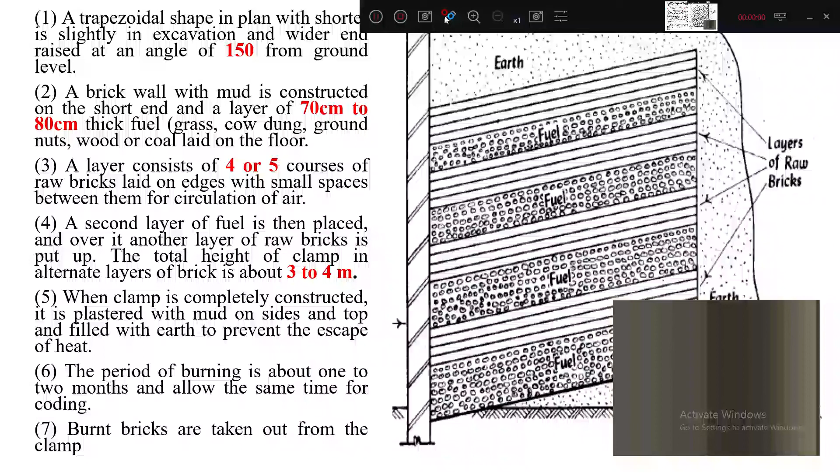So in the previous video we have seen the arrangement of this clamp and construction of this clamp. So here is the shorter side, here is the longer side, a trapezoidal shape; construction of the brick wall is what we have seen, a trapezoidal shape with the shorter side slightly in the excavation and the wider end raised at an angle. This angle, generally we explained, is 15 degrees; it's not fixed, it's somewhat 15 degrees.

So again the brick wall is constructed with the mud itself, and a fuel layer of 70 to 80 centimeter thick is laid. That is what I have written here, fuel layer. The fuel layer may be grass, cow dung, groundnut, wood, coal, etc. On the top, 4 to 5 layers of brick are done. The total setup is covered with the mud. The clamp will be 3 to 4 meter height.

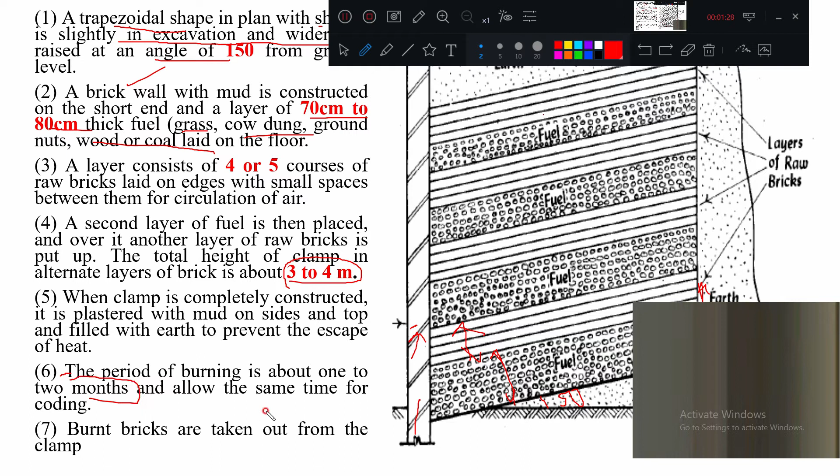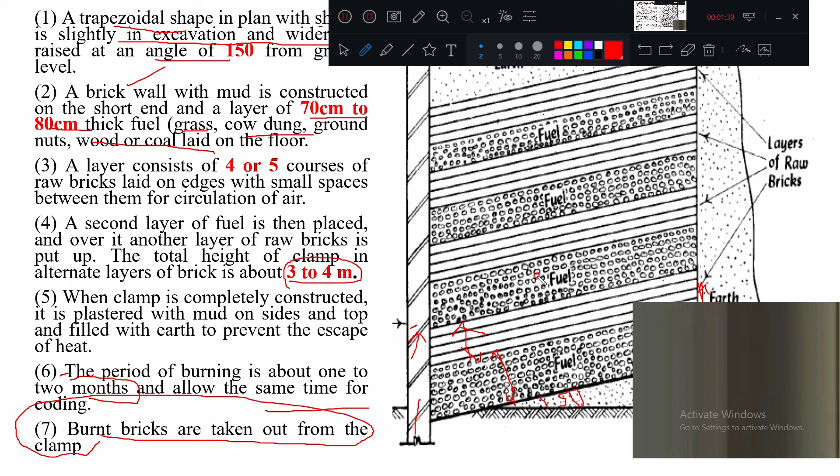Similarly next layers are also constructed, and everything will be covered under the mud to avoid the escape of heat. Here you can see the period of burning may be 1 to 2 months, and after that it is left for cooling again for 1 month or 2 months. 2 months burning, 2 months cooling. Then burned bricks will be taken out from the clamp. So this is clamp construction, or burning of bricks using clamps. This is a temporary construction, you can see.

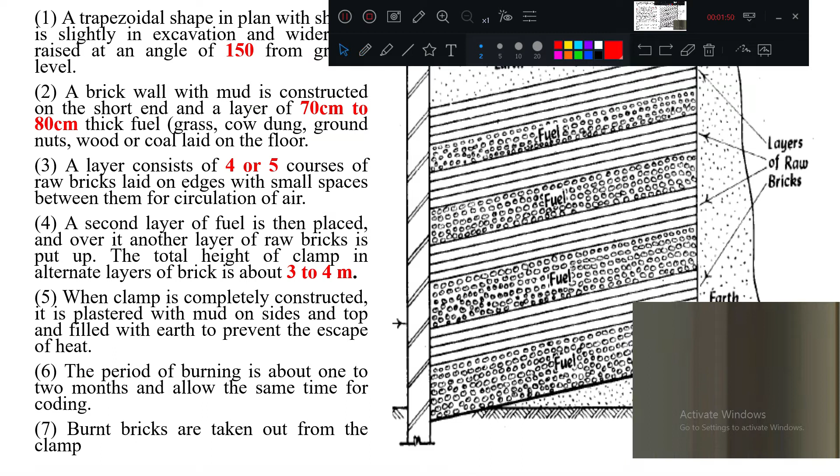So what are the advantages of clamp burning? The bricks produced are tough and strong, because burning and cooling are gradual, slow burning, slow cooling. Burning in clamps proves to be cheap and economical because the fuel used here is less costly. No skilled labor and supervision are required. There is considerable saving of fuel.

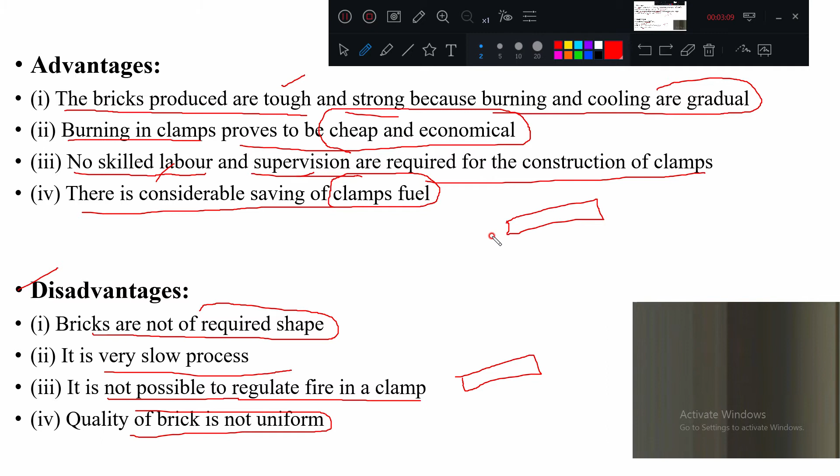Disadvantages: bricks are not of the required shape; maybe some shape distortion is there. It is a very slow process. It is not possible to regulate the fire once the fire is done, so we cannot control the fire until 2 months. Quality of brick is not uniform, meaning some bricks at the lower layer may be overburnt, and some at the edges may be underburnt. Both ways it is possible. So, advantages and disadvantages.

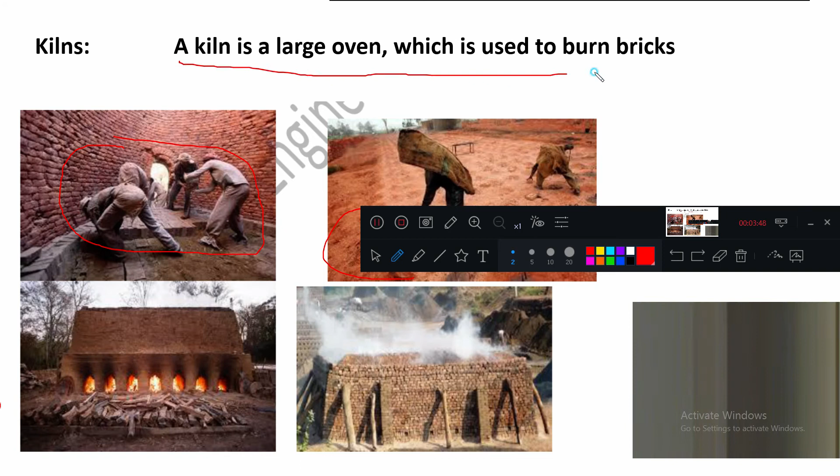Now this is a typical diagram, or you can say photos, of a kiln. It is not a clamp, you understand, it is a kiln. Here you can see the inside of a kiln. This is also one kiln. Sometimes it is called a large oven. A kiln is nothing but a large oven which is used to burn the bricks. You can see the top is open for vents; small vents are also there. Here the burning process is done continuously. Here see the dried bricks are getting arranged.

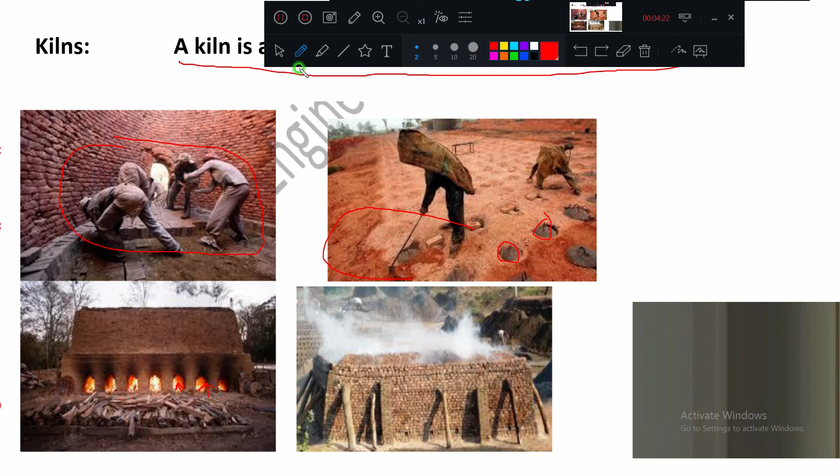I think this is the photo of a bigger clamp. Kiln photos are in the next slide. Here it is. You can easily see the kilns. See here, continuous loading; it is on a bigger scale, a big construction is there. One side burning, another side cooling, another side loading, another side unloading, like this. It is a continuous process. That is why these are called kilns, a big oven manufacturing unit. This is also one big kiln construction.

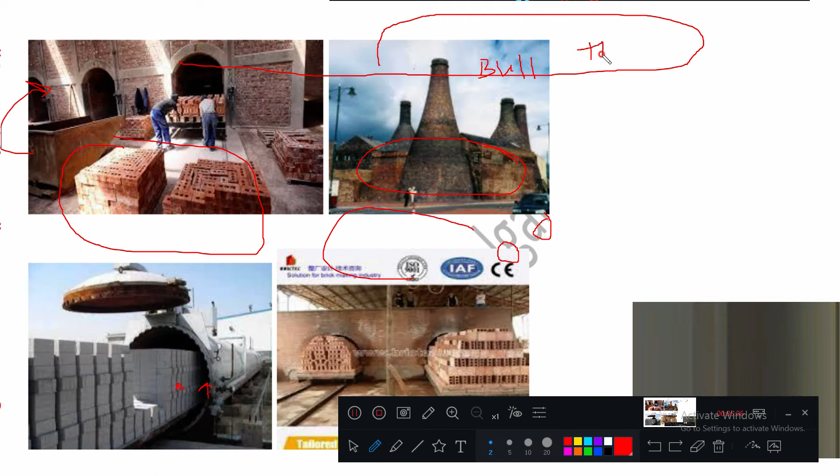It is called the Bull's trench kiln, or Hoffmann's kiln. We will see it in the next class. You remember this one: this is called a tunnel kiln. It is called continuous burning, or tunnel. Continuous movement of the bricks is there, inside high temperature will be there, and from that side you are getting the burnt bricks.

These are called intermittent. These are called continuous. I hope you are understanding. This is also an intermittent kiln. But this diagram is for a continuous kiln. How? What is the difference between intermittent and continuous? See here.

Here one set of bricks are laid, one set of bricks are pushed here, burning will be done, cooling will be done, and they are taking one load at a time. Similarly for this yard also, here also loading, burning, cooling, taking out, unloading, like that. So it is done in an intermittent way.

But what is happening in the tunnel? Continuously bricks are going inside. Here burning is there, here cooling is there, continuously bricks are coming out that side. So that is why we call it a continuous kiln. Two major classifications: intermittent kiln and continuous kiln. An example of a continuous kiln is the tunnel type.

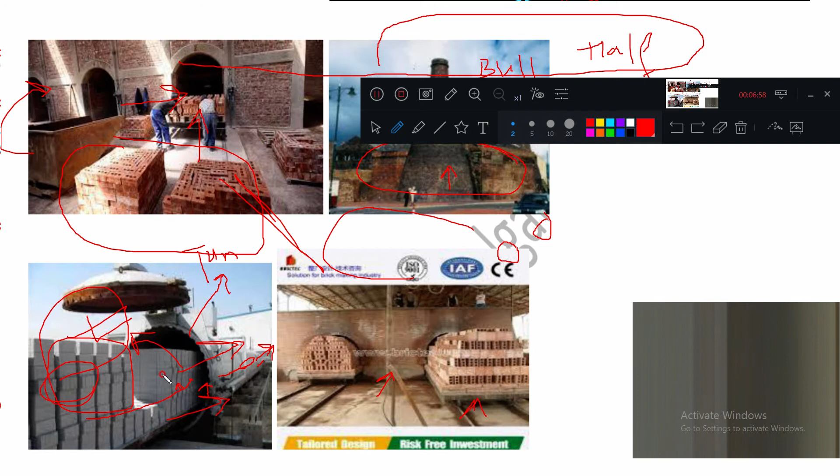But for others we have Bull's, Hoffmann's, Scotch. Like that, there are so many types. So remember this point. We have intermittent kilns where a loading and unloading system will be there. But here, continuous type: continuous loading, and on the other side continuous unloading.

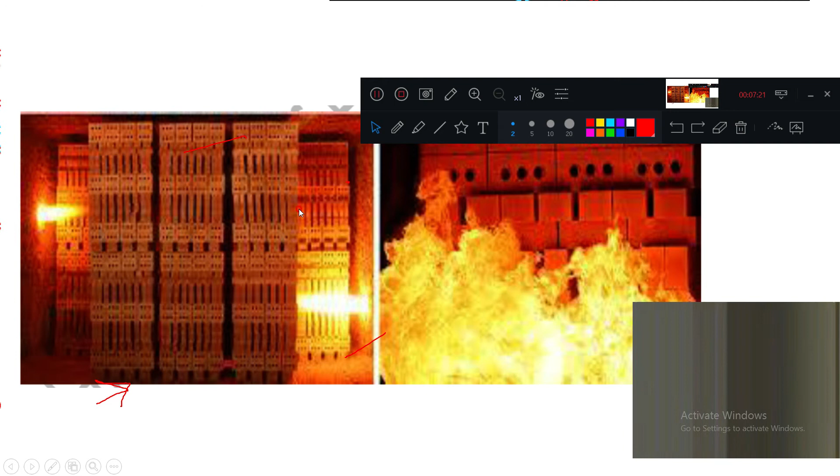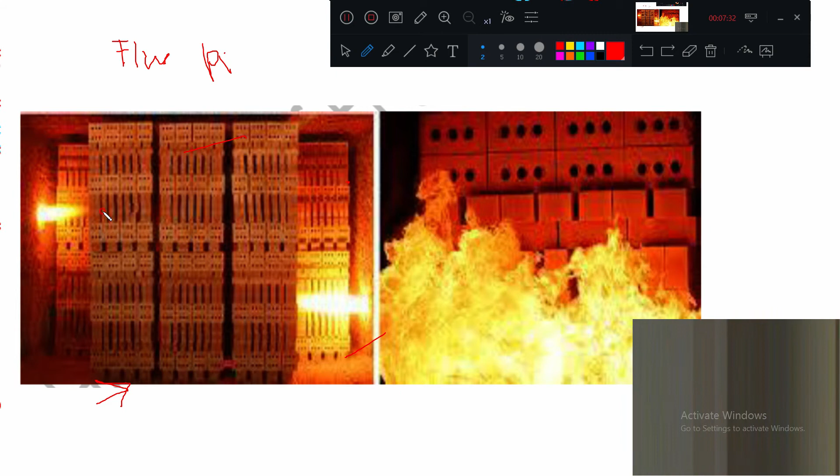You can see what is happening inside the kiln. You should understand one word: flue pipes. Flue pipes are nothing but pipes. Here the pipes are there. These pipes are embedded inside the wall and they are running in the wall. Here also like that.

Through these flue pipes, flue gases will be coming out. Flue gases, once they catch fire, will burn these bricks. Understand these two words, very important. So if the flue gases are coming horizontally and they are burning like this, these are called draught down.

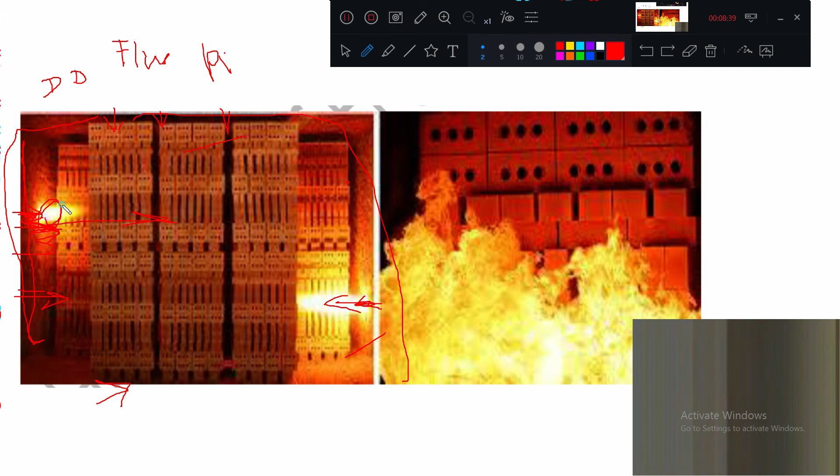In some cases the gases may come like this. See, this fire is there. These fires are coming from sideways, so that is why we have given draught down. In some cases fire may be coming from the top, so we call it draught up type. The pipe it comes through is called a flue pipe. So the burning process is done inside the kiln. Remember draught up, draught down, flue pipes.

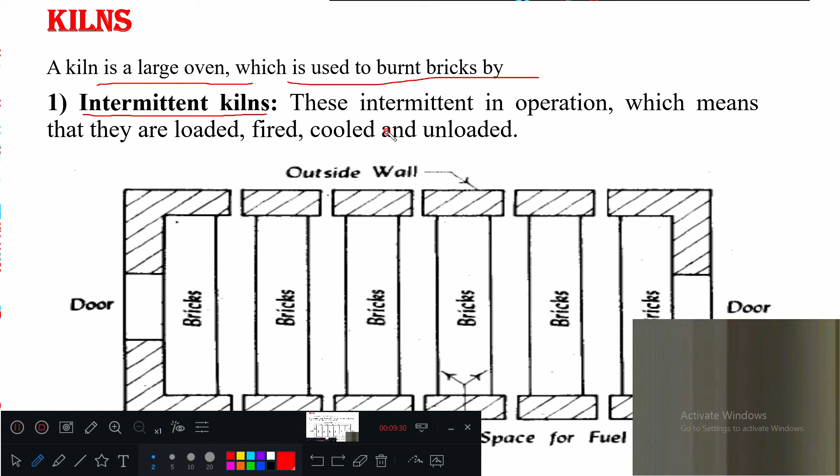Now you can see kilns. What I was telling, intermittent kilns. A kiln is a large oven which is used to burn the bricks. Intermittent means what? It is intermittent in operation, which means they are loaded first, fired, cooled, unloaded.

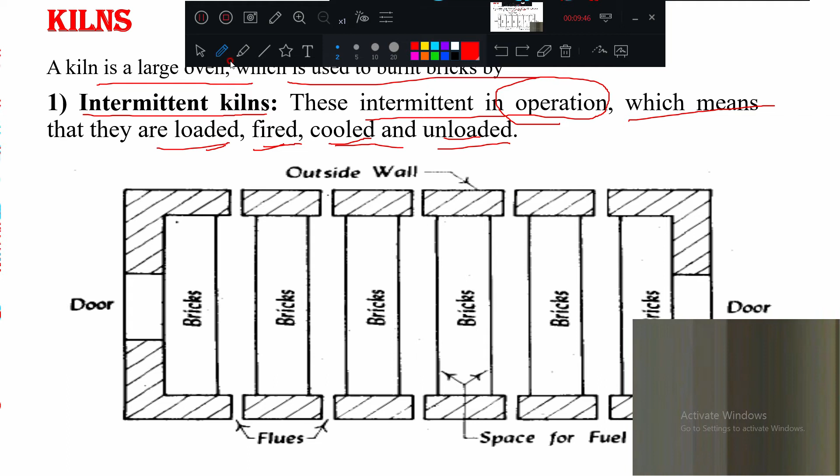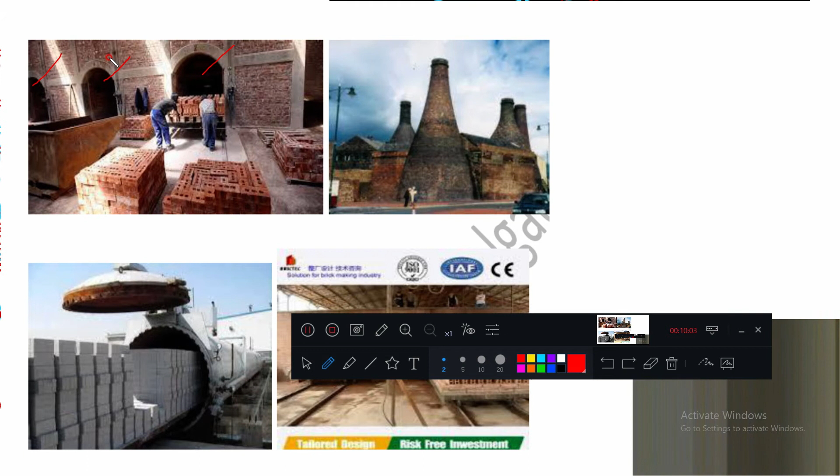So this is each compartment. This is a plan. We can go to the previous one. For that, this is the schematic diagram. Can you see this diagram? So these are the compartments I was showing for this kiln setup, the plan we are drawing. You can see the plan is this.

This is the entry door. This is also a door. These are fixed walls, or, sorry, these are bricks. So bricks have been kept like this. Inside the bricks, what is this? Flue pipes or flue gases. So these will burn them. Is it okay with you?

So door, and bricks are kept inside. This is a plan. Flue gases or flue pipes will be there like this. So the gases will come and burn this. So that is an example of intermittent.

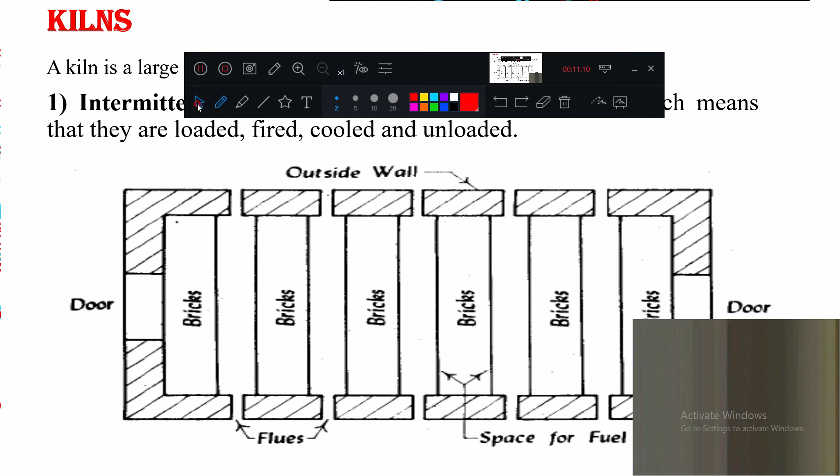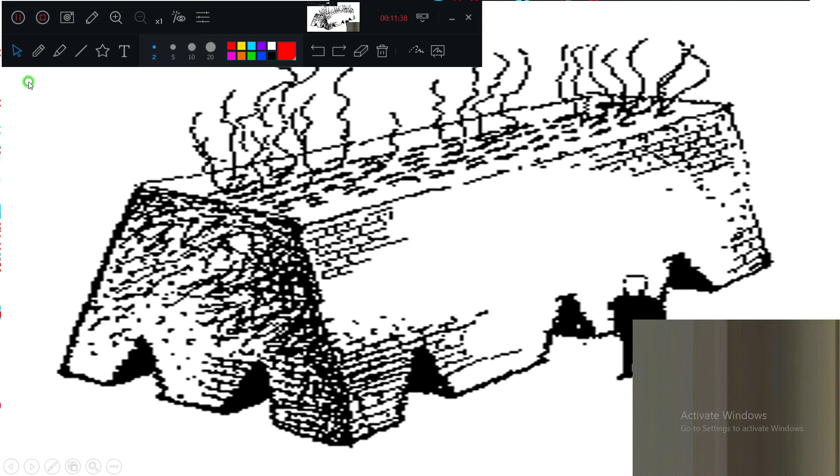This is also one schematic diagram for bigger clamps. This is a clamp. So again clamp burning is shown here. Chambers have been made. That is also the same photograph. After burning it is left for cooling, and the burnt bricks are taken to the site. These are called clamps. You can easily see.

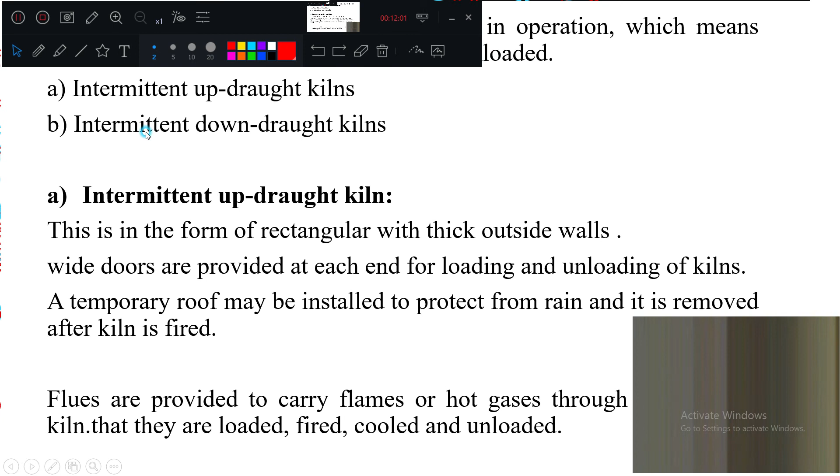This is the intermittent kiln we were discussing. Here you can see intermittent kilns. Also we have up-draught and down-draught, what we have shown. This is also in rectangular form. Just remember rectangle with thick outside walls. Here also the doors are there. Temporary roof, no need to remember this thing.

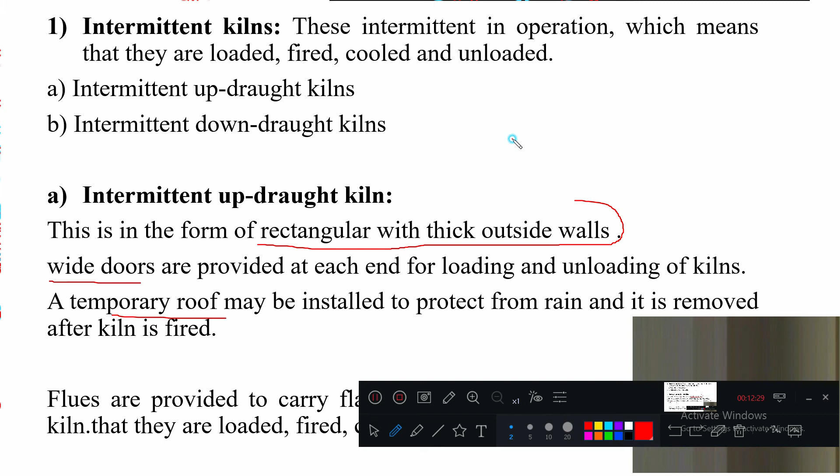So obviously kiln means what? There will be outside walls. There will be a roof on the top casing. There will be doors. Simple. Only those three points are explained here. The differentiating point is this.

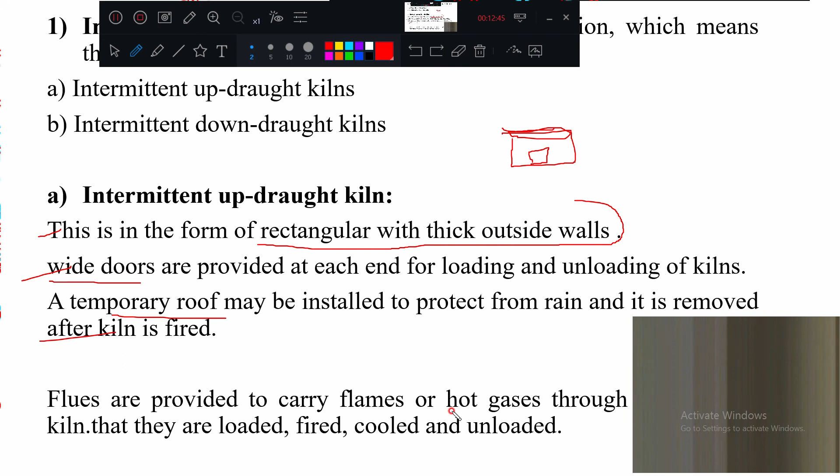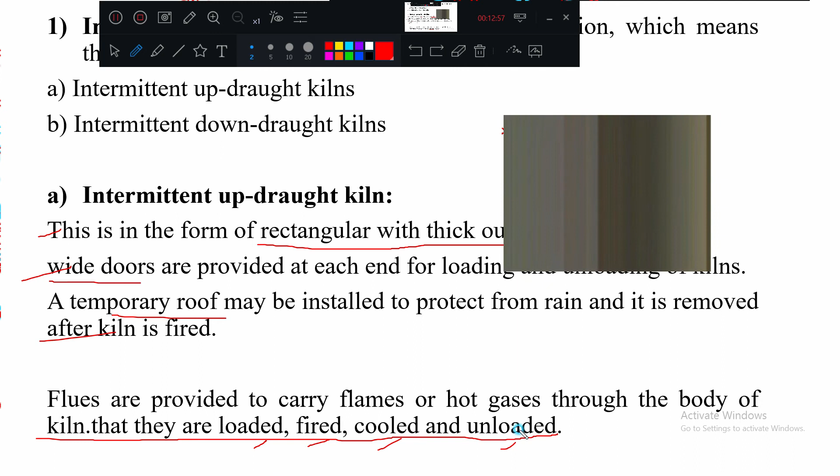Flues are provided to carry the flames or hot gases through the body of the kiln, in which the bricks are loaded, fired, cooled and unloaded. Okay. So intermittent up-draught means here the gases will come.

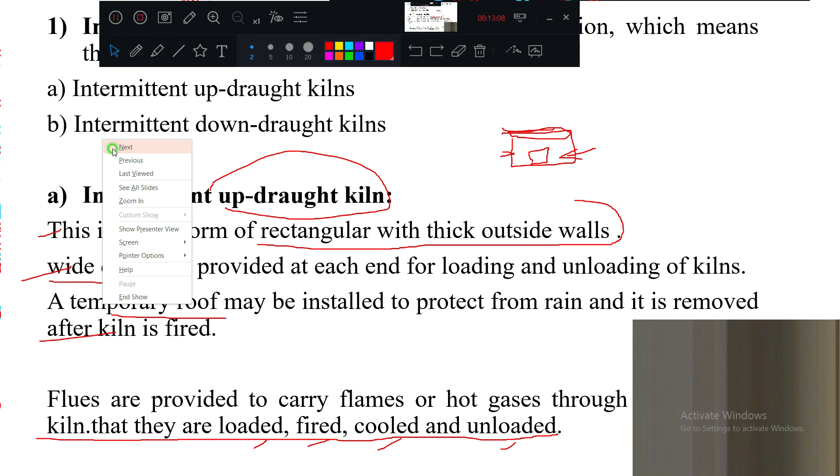Okay. So these are the simple arrangement. Raw bricks are laid in rows of thickness of 2 to 3 bricks, means what? 2 to 3 bricks are kept in a single row. Height 6 to 8 bricks.

Flues are filled with brushwood, which takes up fire freely. Okay. Loading of the kiln with raw bricks is finished with the top course of flat bricks, and other courses are formed by placing the bricks on the edges.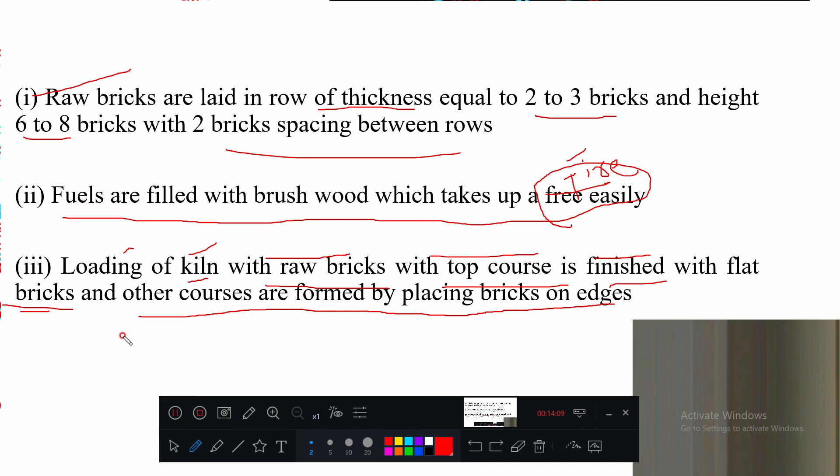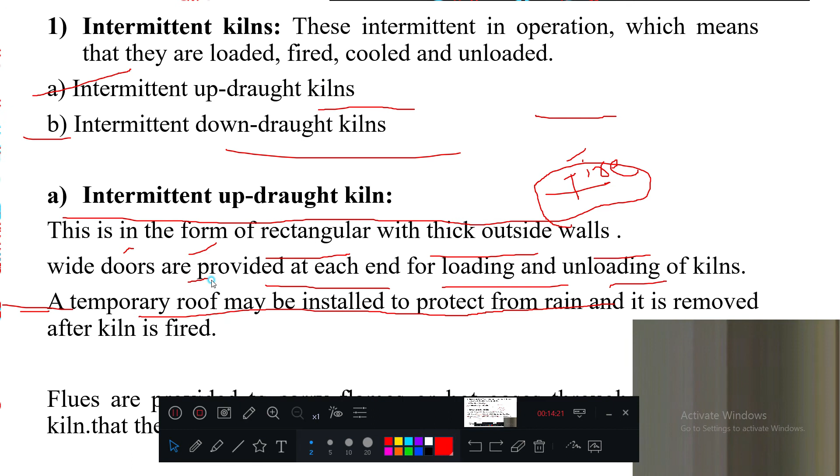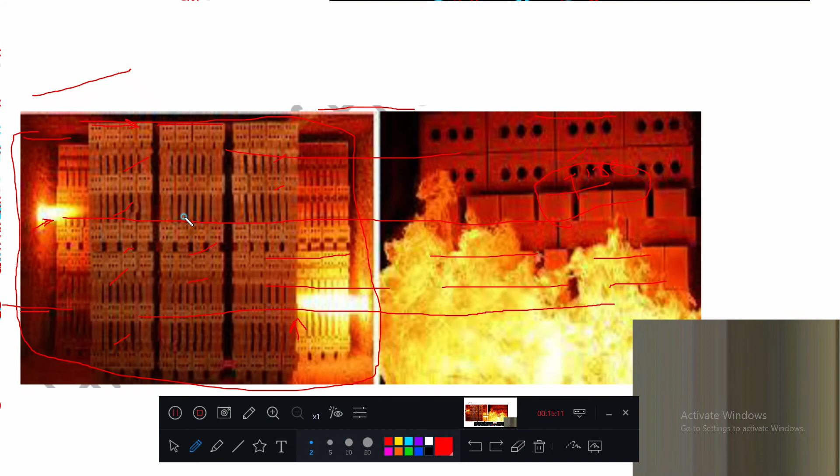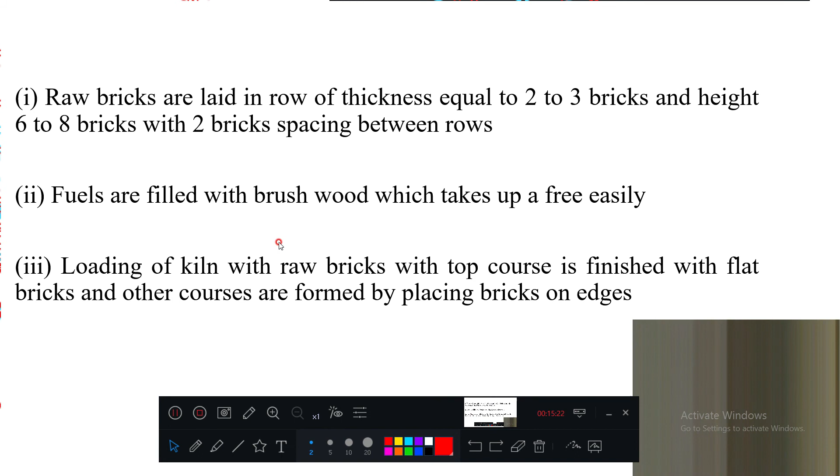The next explanation is same only, very simple. Each door is built with dry bricks and covered with mud or clay to avoid heat escape. The kiln is then fired for 48 to 60 hours. Draught rises in the upward direction from the bottom of the kiln and brings about the burning of the bricks.

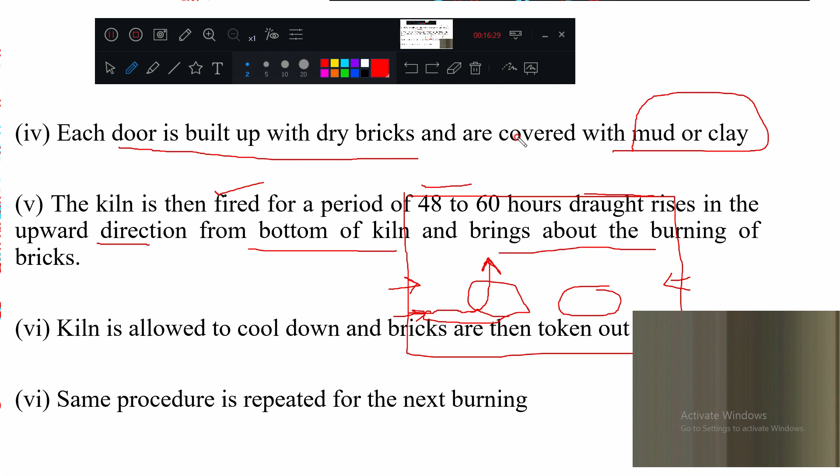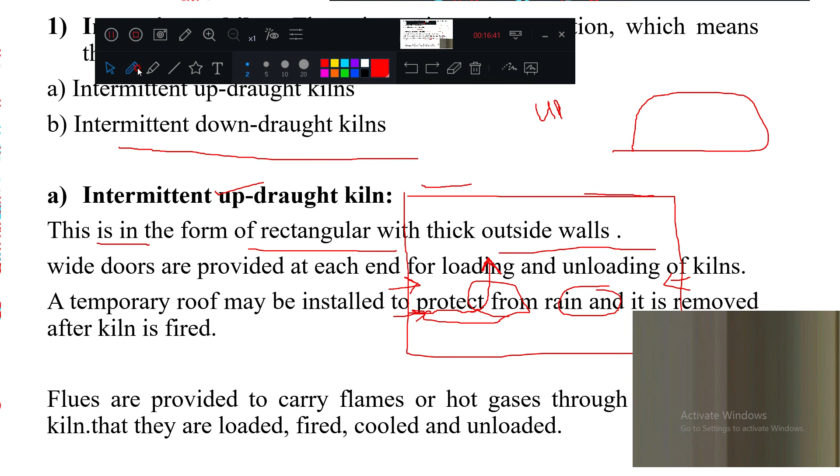So in that diagram, the fire was there from the sideways, do you remember this point? From these side flue pipes, fire will come and burn these bricks, and during this burning process this fire, or you can say draught, will rise. That is why the name given is updraught kilns.

In this diagram, I will explain the difference between updraught and downdraught. Updraught means the draughts are going upward. See here, this is one flue pipe, and this is also one flue pipe. Draught is nothing but, during the burning process, the heat going like this. So these are called updraught.

In the downdraught type, the same flue gas setup is coming from the top side, such that the gases are going in the downward direction. So these are called downdraught kilns. But in the actual figure, it is updraught. The same fire, if it is coming from the top, then that is called downdraught.

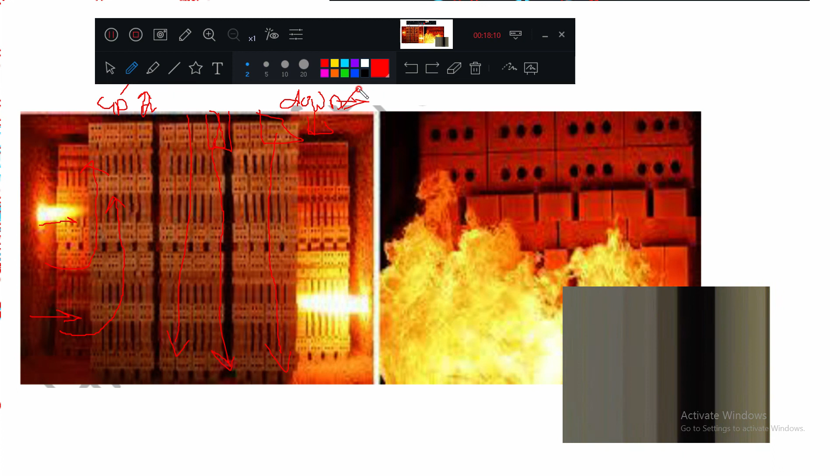Depending upon the movement of the draught, these are called updraught or downdraught. If the draught is moving upward, it is called updraught. If it is moving down, it is called downdraught. Compared to updraught, downdraught burnt bricks are more uniform, and in the downdraught type the fuel consumption efficiency is more, but in updraught it is less. These are the two differences.

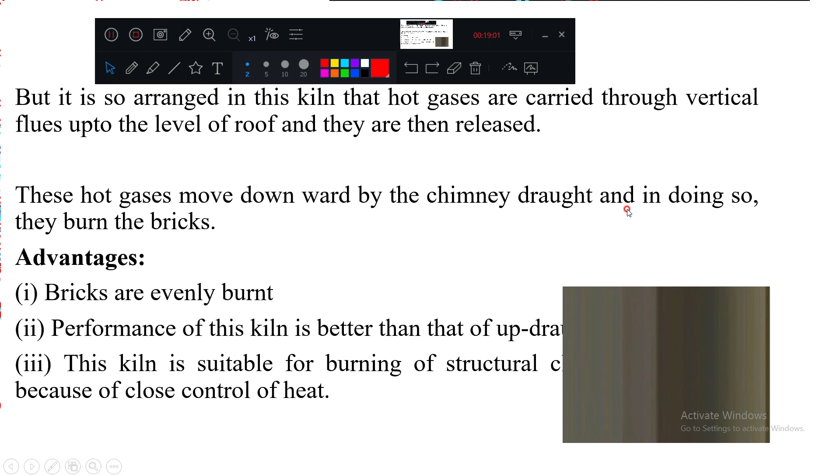See here, you can see. The hot gases move downward by the chimney draught, and in doing so they burn the bricks. What is this explanation for? This is the explanation for downdraught, what I have explained. The draughts are coming from the top but going in the downward direction. That is called downdraught.

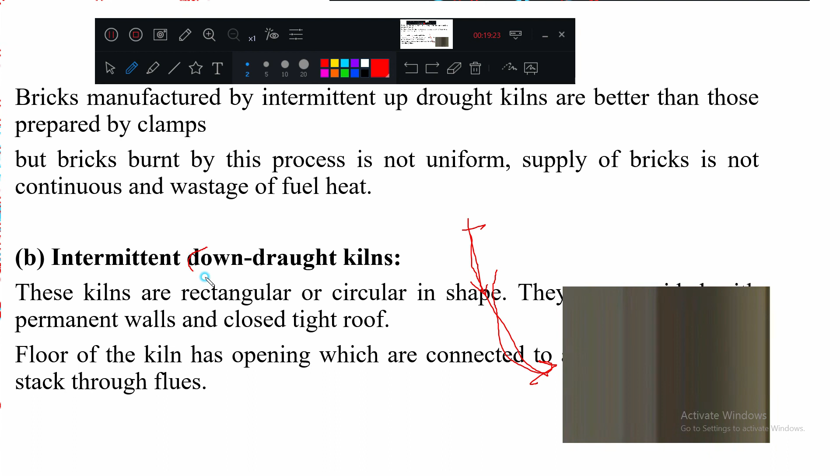In the same way, if it is coming from the side and moving towards the top, it is called updraught. Very simple, only you need to remember these two things. The remaining is enclosed, covered at the top. Everything is same only.